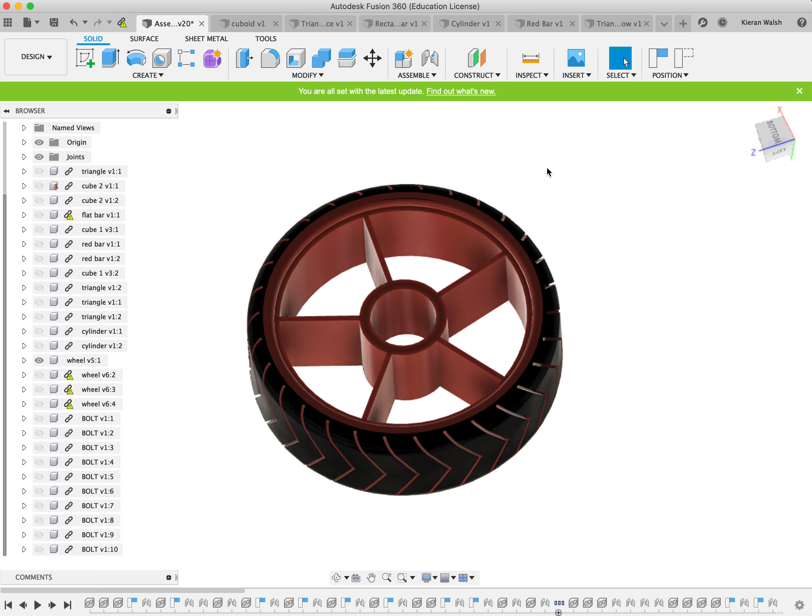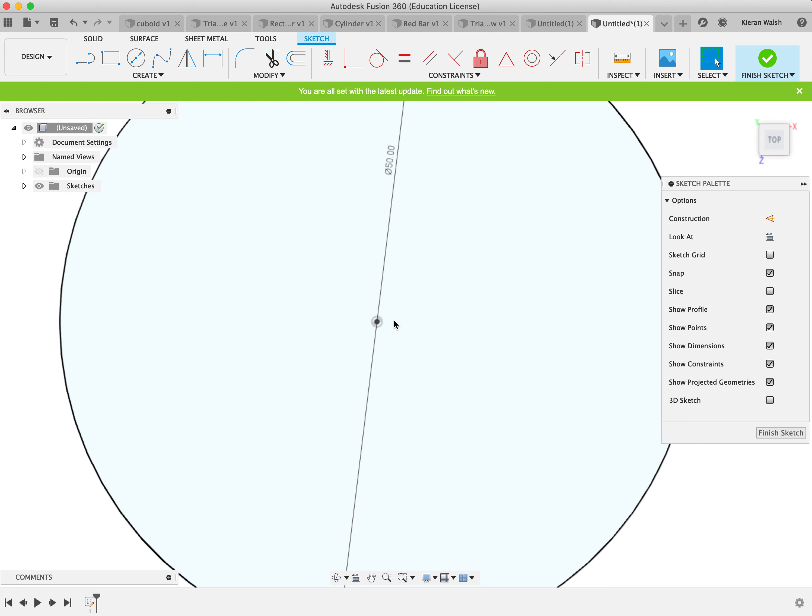So to do this, we're going to draw part of the shape, then use the pattern tool. So we're going to draw, first of all, the outer wheel, which is about 50 mil diameter. We'll then press C and draw the center, or the thickness of the outer part. So say 48, so it makes sense in a minute when you see it.

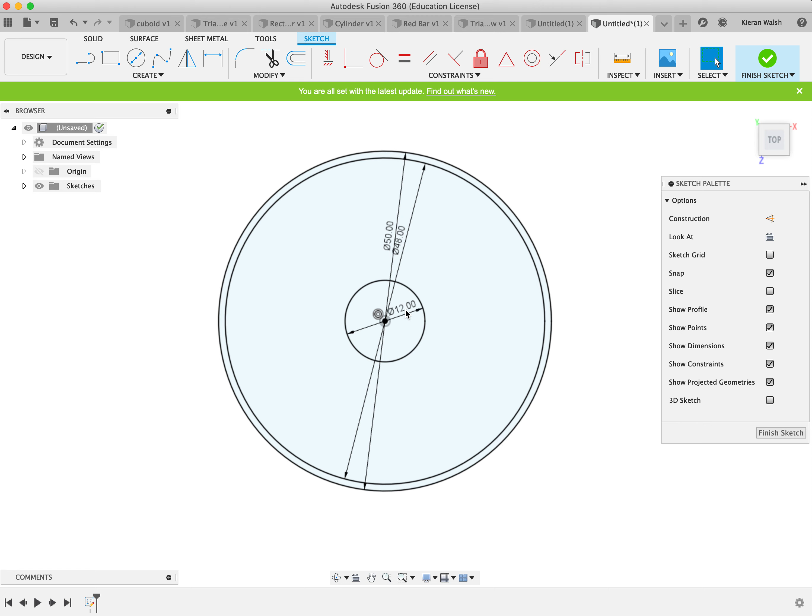And then the inner circles, so the central 12mm hole as always. And again, slightly thicker. So this is the thickness of the material. Between here and here is 2 mil. And again, here the outer part of the wheel.

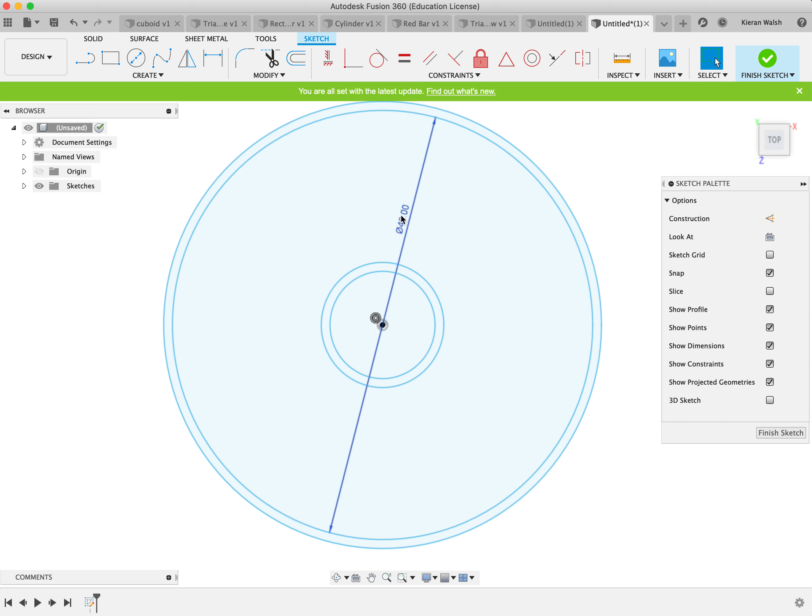Then sometimes dimensions can get a little bit messy, so I just sometimes delete them after I've drawn them. So just click on them and press delete. And press the line tool.

I'm going to draw a straight line up from the center to the outer edge, like so.

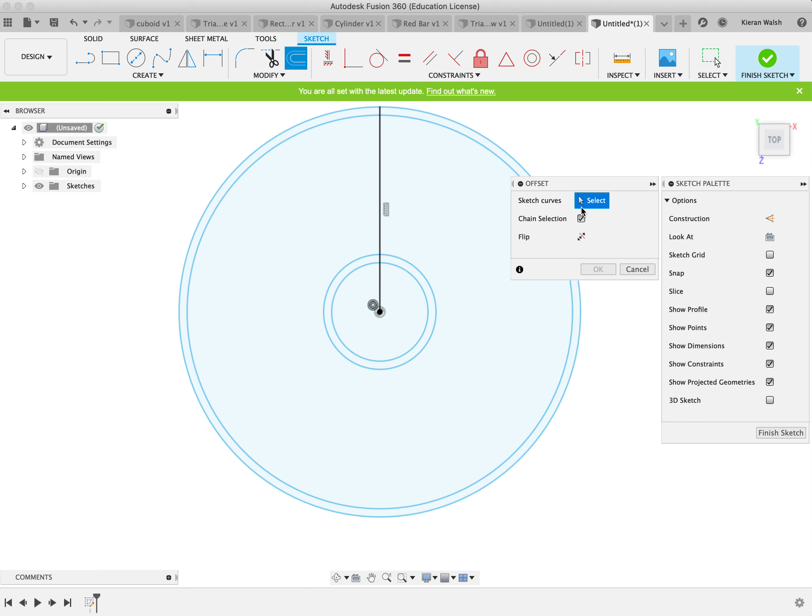Then you want to create the same thickness of the part here, but obviously this is the center. So to do this, I'm going to use a tool called Offset, which can be used for lots of stuff. I'm going to click on that line, and you'll see it creates a parallel line, a set distance to one side of that line.

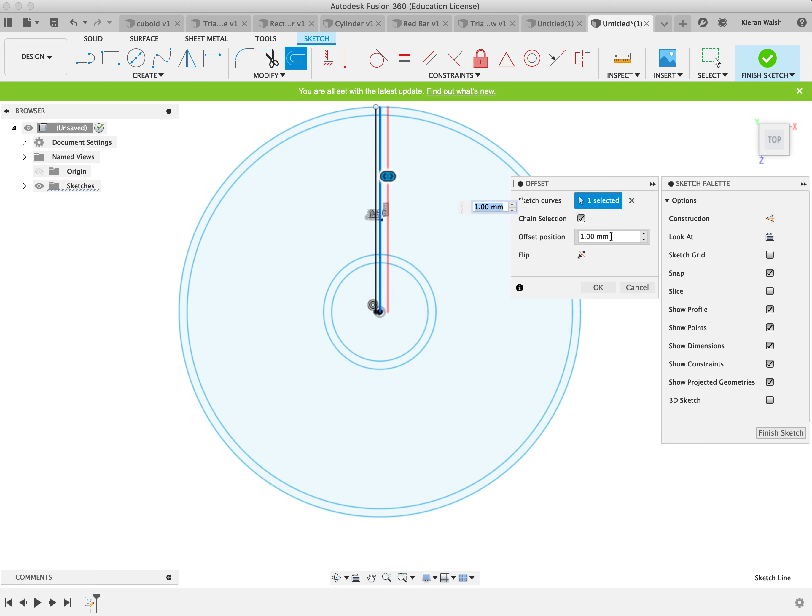Do the same again, 0.5, and click OK. So you've now got these 3 lines running up here.

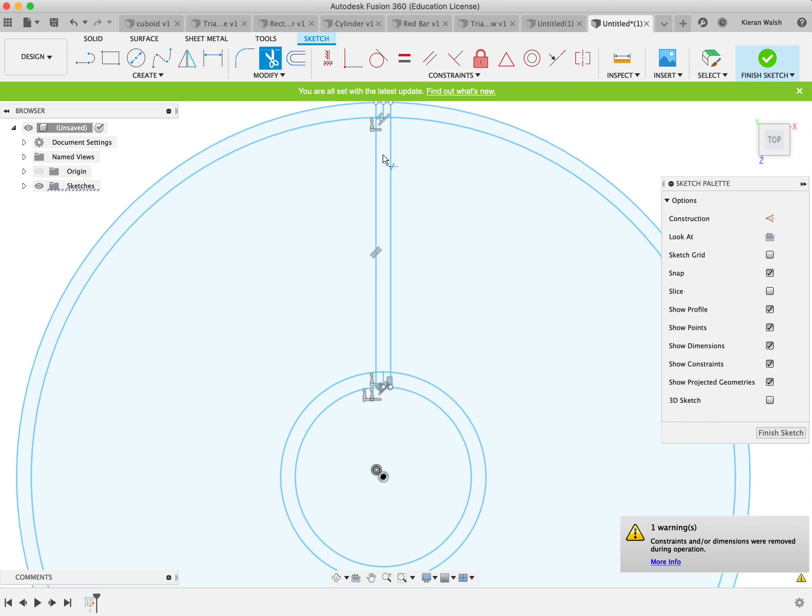So I'm going to use the trim tool now, which you've used before. Press T, just up here in the menu bar. And I'm going to delete that one. And then I'm going to try to delete this bit and this bit. Don't need those anymore. And even those bits we'll try.

So now what I'm going to do is pattern these two parts around to create the different spokes of the wheel.

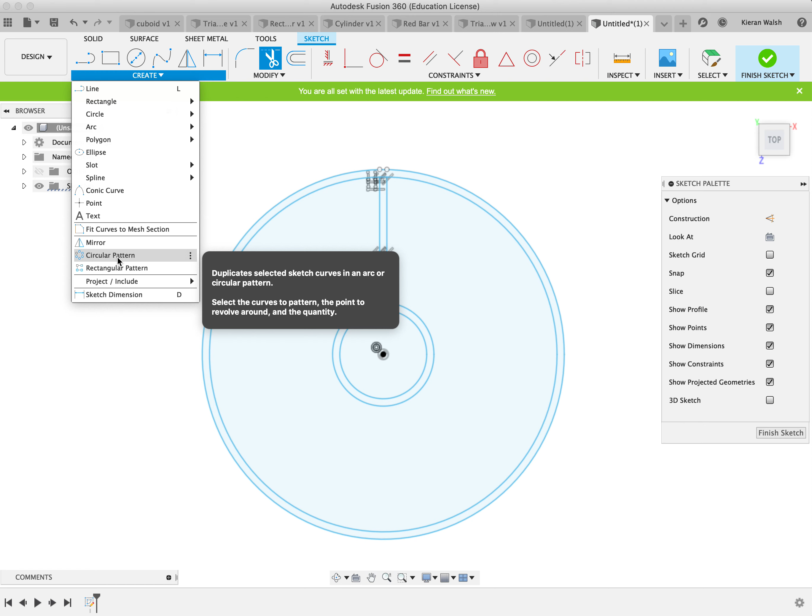So go to under create, go to circular pattern. It asks you for the objects, to select the objects you want to pattern, so we're going to select those two. You see here it tells you there's 2 lines selected. And then it says center point, which is here. Make sure you've selected the proper center point.

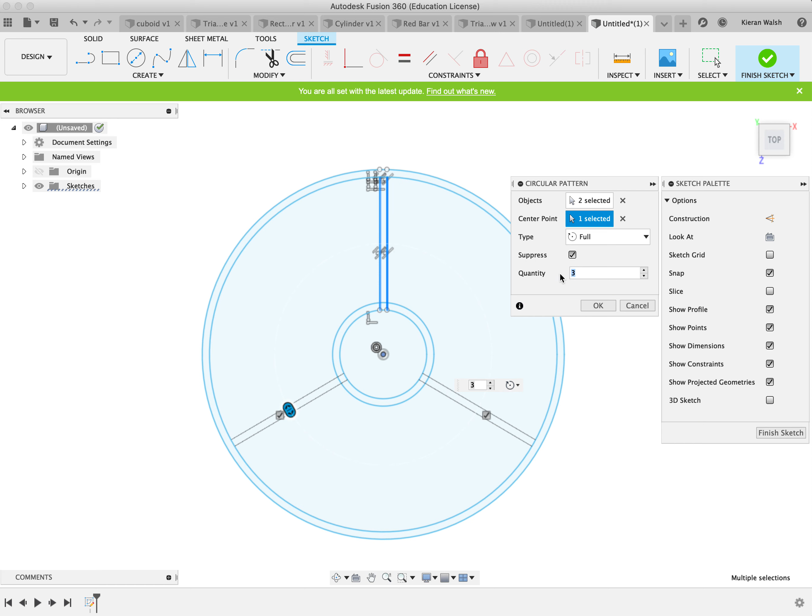And you'll see it automatically generates 3 of them. I want a bit more, I want 5. You can obviously do more if you wanted to, but 5 is enough for this. You can change your design as you wish.

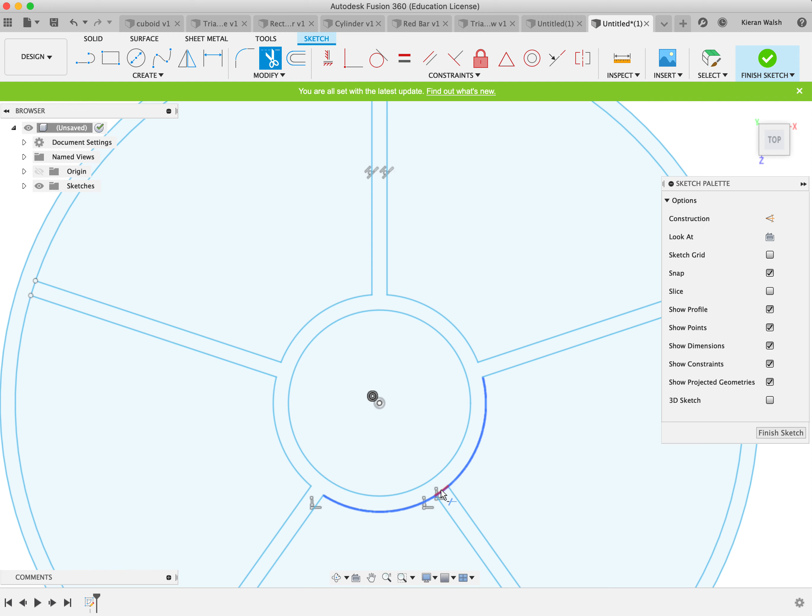Okay, now I'm going to use the trim tool. I'm going to delete again. Sometimes you don't actually need to use the trim tool, I just find it a better way of cleaning up your sketches to make sure it's the proper profile of the shape you want to extrude.

Again, slightly different ways of working with the software, up to you to develop your own ways of doing things, but this is one way, possibly the simplest way of doing this sort of shape.

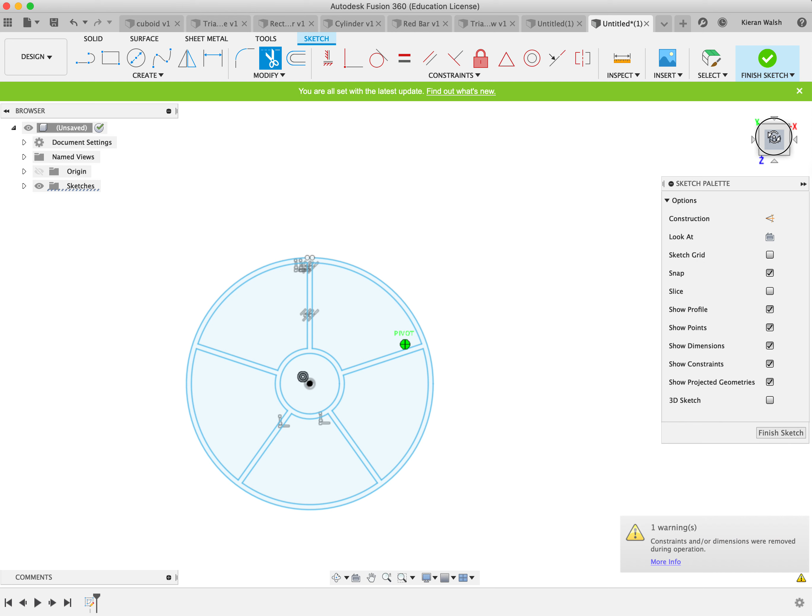Then finish the sketch and extrude it. And I think the thickness was about 15, maybe 20. Again, you can decide, you can change the design to make it what you want.

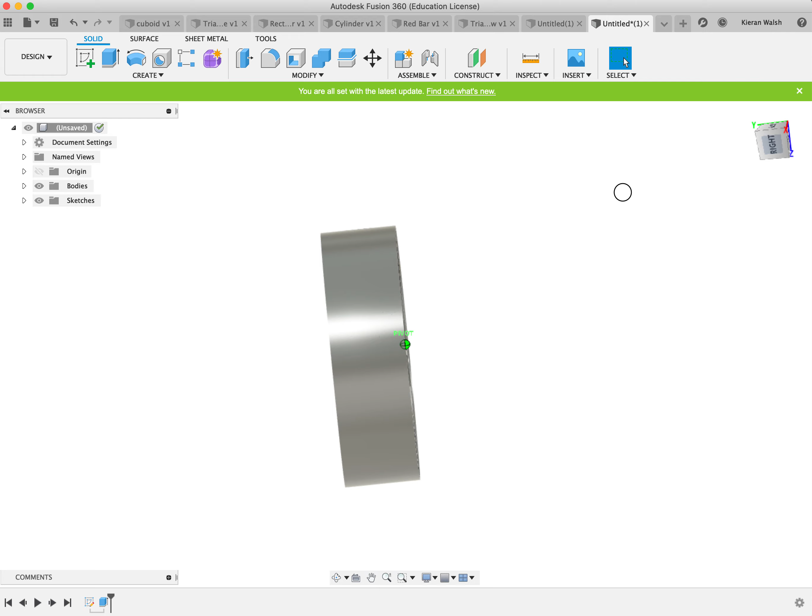And that is the inner part of the wheel.